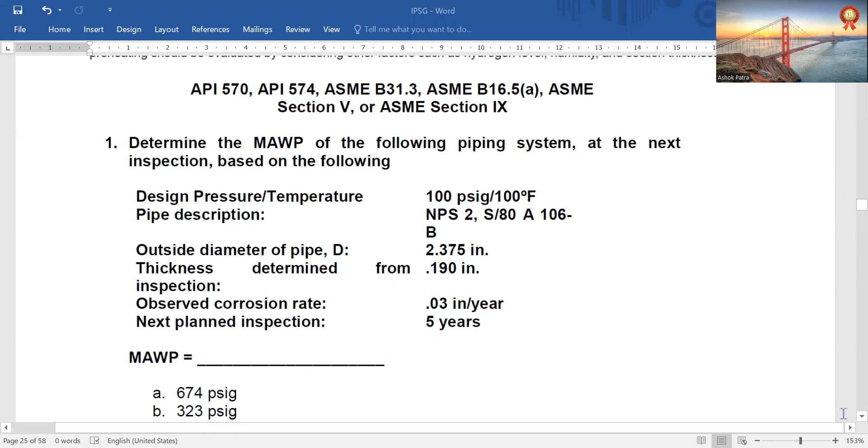You can find from the table 20,000 is... So it is 2 into S, 2SE, T minus 2 times corrosion, total corrosion.

It is taken for 5 years, it is not for 1 year. It's 0.03 into 5, that is 0.15 years taken. Just put here like this. Don't be puzzled by this. 2 into 0.03 into 5. All these things are there. So finally you get 2.

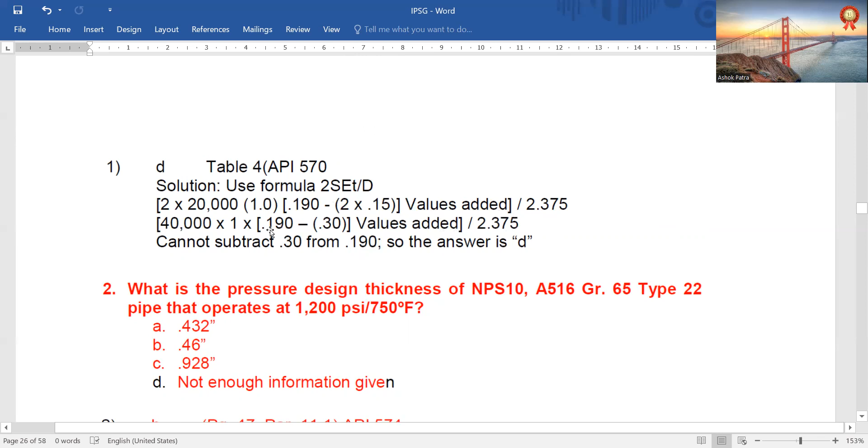Cannot subtract 0.3 from 0.19. So that answer is D. That means metal loss exceeds the requirement of the 5-year inspection interval.

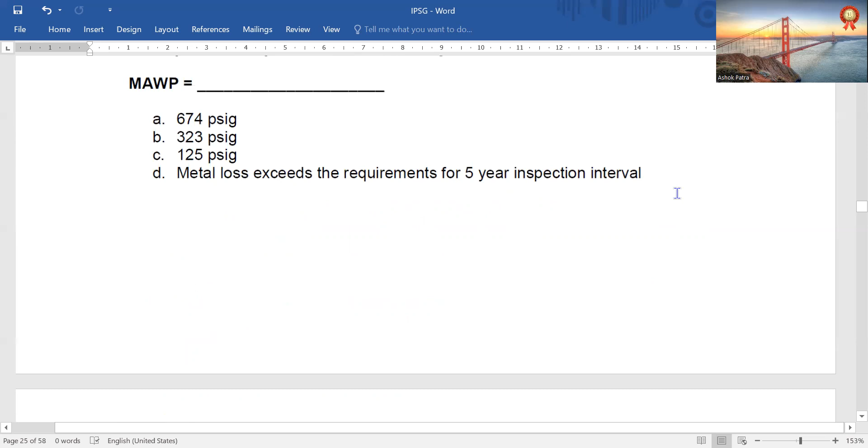But the pressure design thickness of NPS 10 A516 grade 65 type 22 pipe that operates at 1200 psi, 750 degrees Fahrenheit.

Same as before, you have to find it. This is 13900, but 1200 into 10.75 divided by 2, 13900 into 1, that's all. 0.46 is the answer. 0.46 inch.

A leak test is an alternative to inspection of buried piping. What is the minimum liquid pressure to adequately conduct this test? 10% greater than MAWP.

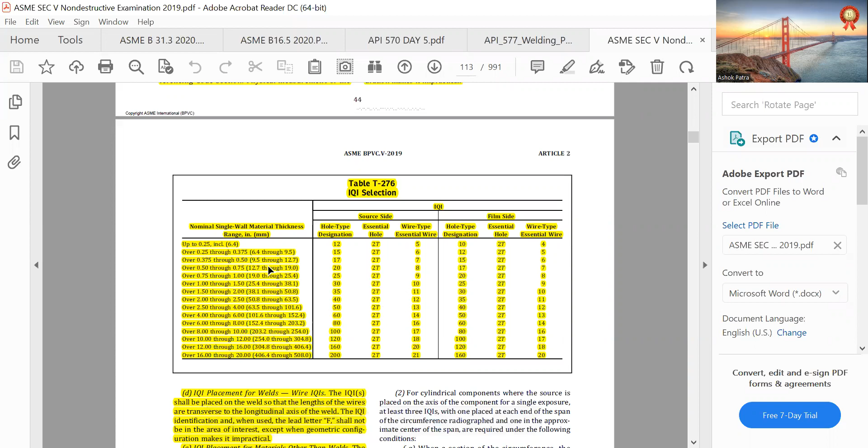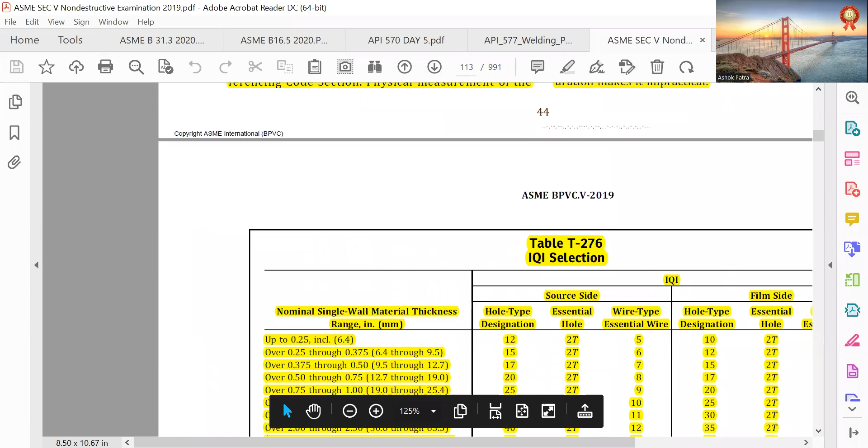So this is the inch and mm, you can just... over 0.375 through 0.5. And what is the question?

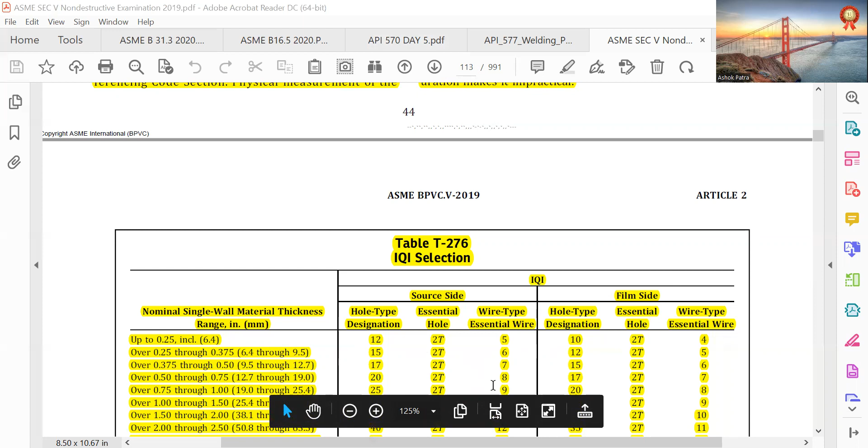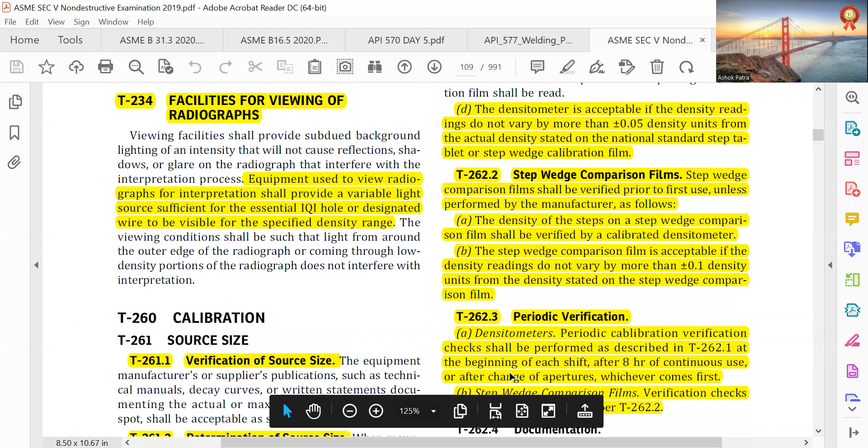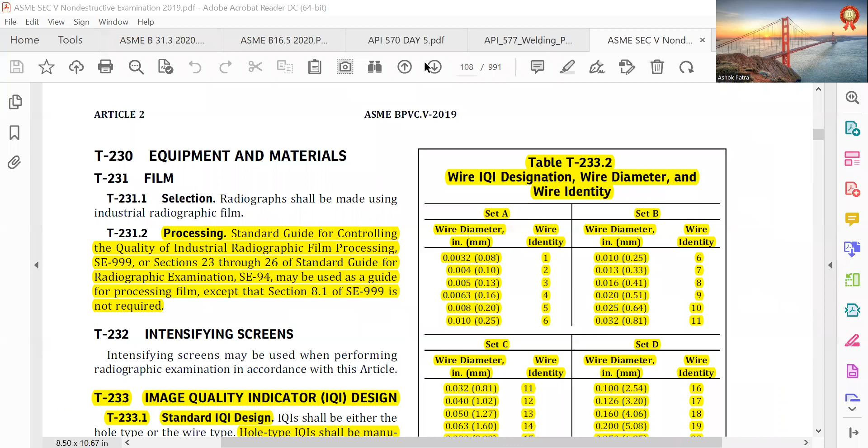Give the corresponding P number for 414 grade A material. You find it, or just remember it. Find from section 9. 414 grade A.

In class 1500 NPS for blind branch, what is the minimum thickness permitted? You have to calculate this.

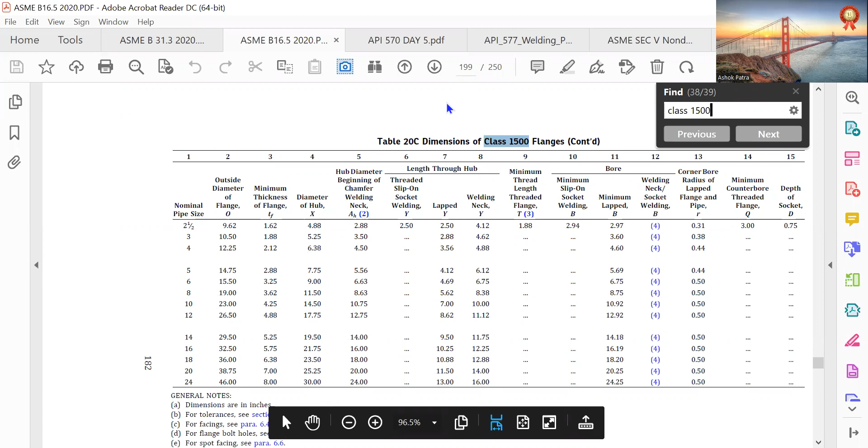For 1 1/4-inch thick carbon steel, what is the recommended preheat temperature? 1/4. Go for the preheat table.

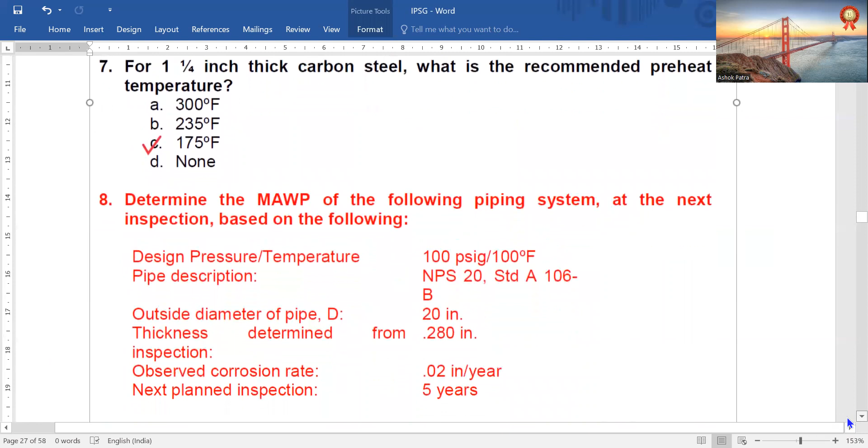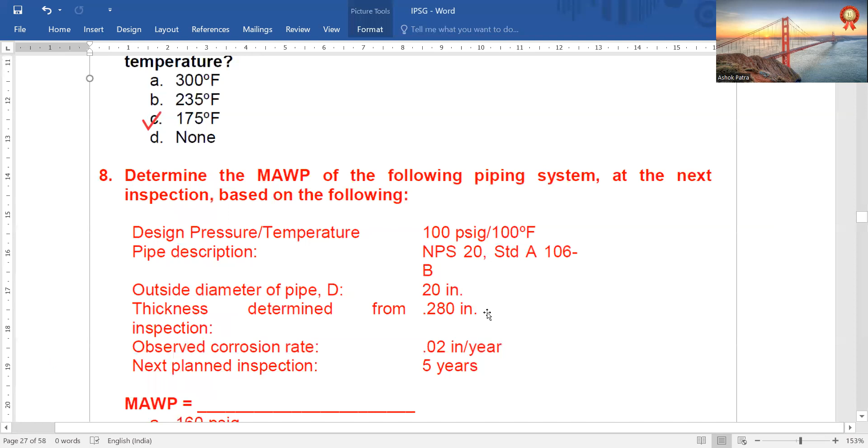Determine the MAWP of the following piping system at the next inspection based on the following: design, pressure, temperature, pipe description. 20,000 will be 20,000. If you see each time, you can understand. Diameter 20 inch, 0.28, 0.02, 5 years.

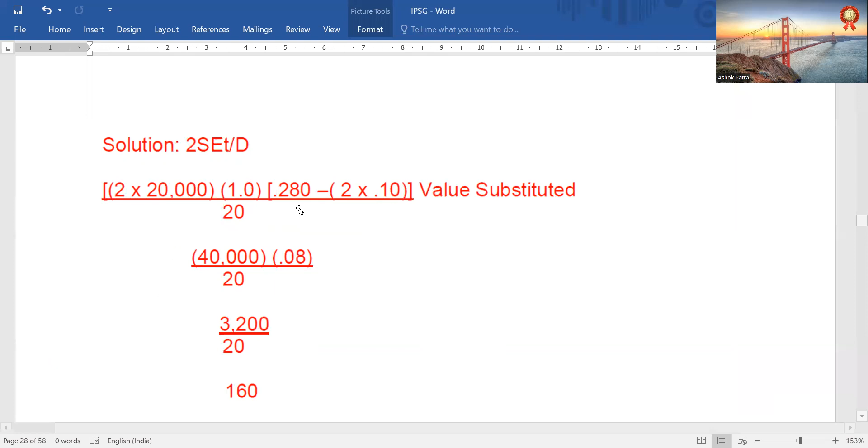20,000, 1, 0.28 minus 2 into 0.02 into 5. That is 0.1. So you have 160 psi. A is the answer.

With respect to category D service, what is the maximum allowable undercut for the branch connection? Less than or equal to 1 by 32 inch, less than or equal to 1 mm, both B and C.

But the test pressure of a metallic piping system whose design temperature is above the test temperature, using the following condition: NPS 6, A106B, 100 psi, 100 F.

So pressure test is 1.5 ST. ST is the temperature at the test pressure. Sorry, the stress at test pressure and stress at design temperature.

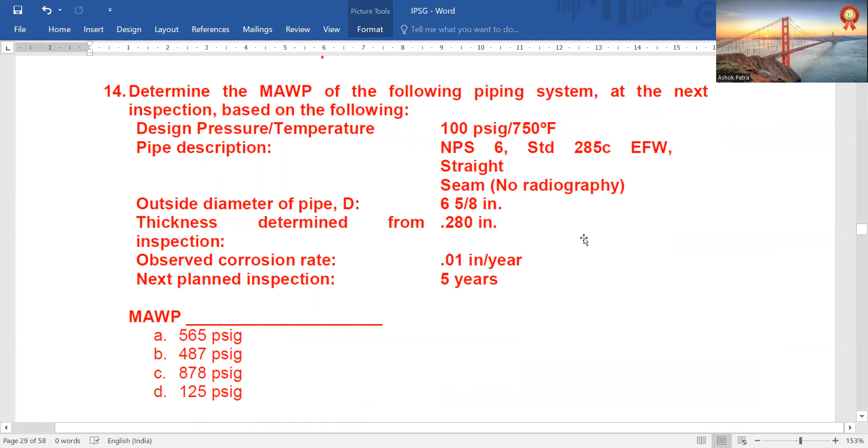Determine the MAWP of the following piping system at next inspection based on the following: 100 psig NPS 6, EFW electric fusion welding, straight seam, no radiography, 6 5/8 inch, 0.28, 0.01, and 5 years.

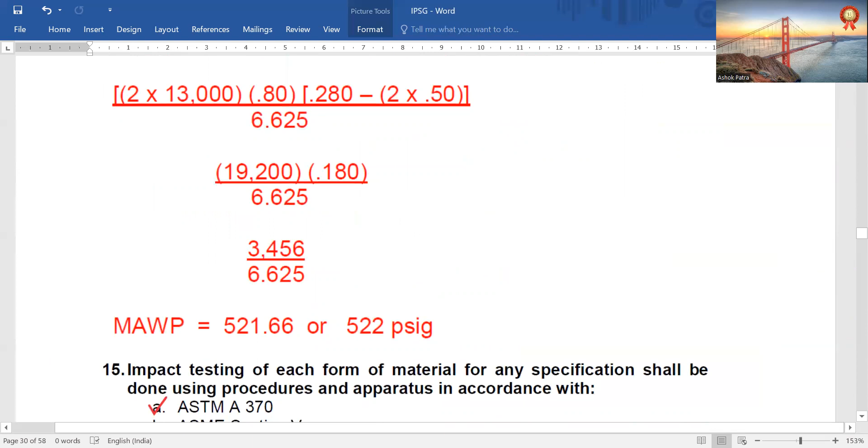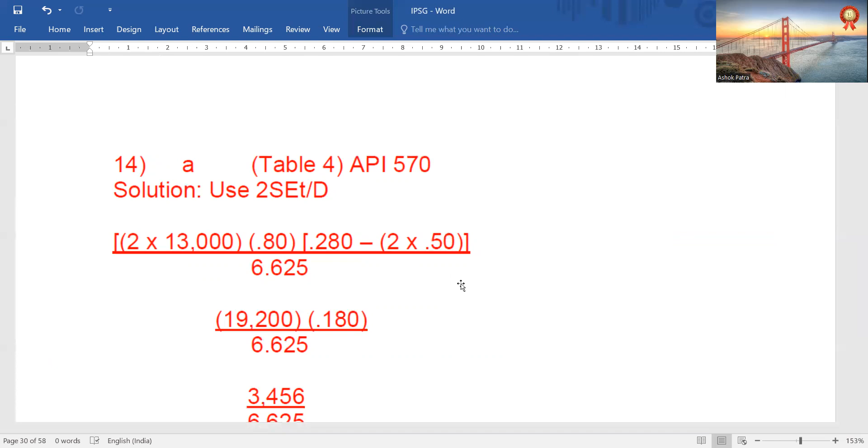They find 13,000, so 2 into 13,000 into 0.8. The efficiency factor is, welding efficiency is 0.8, and 280 minus 2 into 50 divided by 6.625 D. This 0.5 is 0.1 into 5.

So MAWP is 522 psi. 565, not there, it is not there. Should be 522.

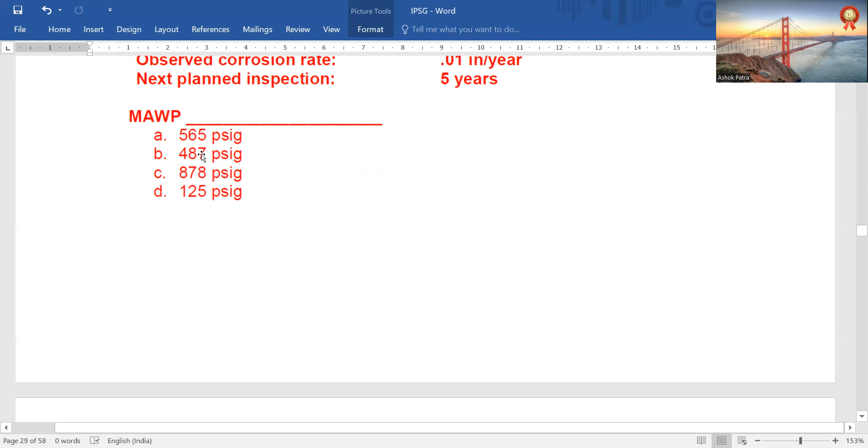Impact testing of each form of material for any specification shall be done using procedure and apparatus in accordance with ASTM A370. Impact testing of each form of material for any specification shall be done using procedure and apparatus in accordance with ASTM A370.

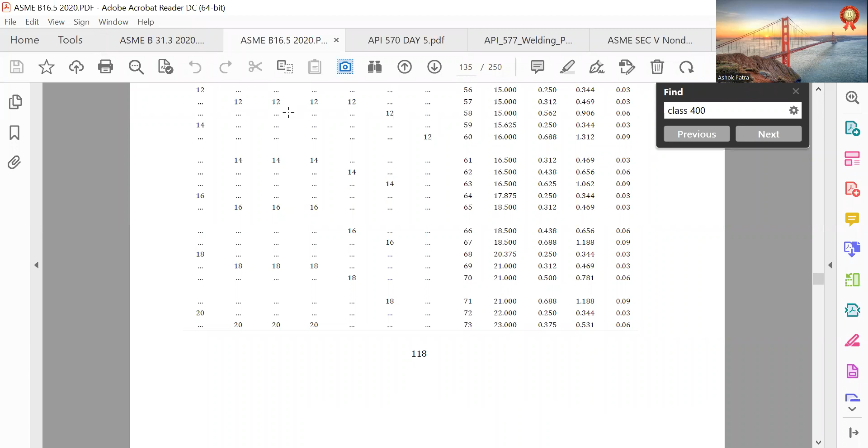Diameter, how much given? 14. Oh, NPS 12. So if you see NPS 12, so it is 12 if you go for like this. Class 400, 12, you go straight 15 PCD.

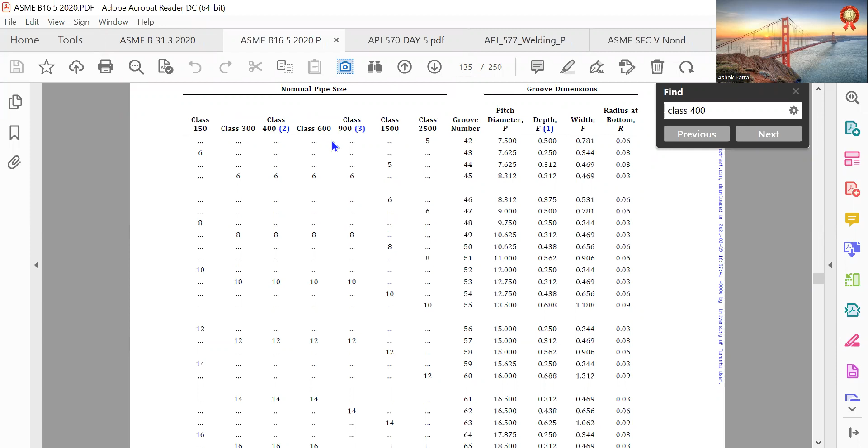Base metal P number 8 and the weld metal is A number 8, and the wall thickness is 1 inch. What is the hold time for heat treatment? Normally for SS we are not doing this, so none is the answer. This P number 8 is SS.

And regularly furnished class 300 raised face flange, what is the height of the raised face? From class 300 have to go.

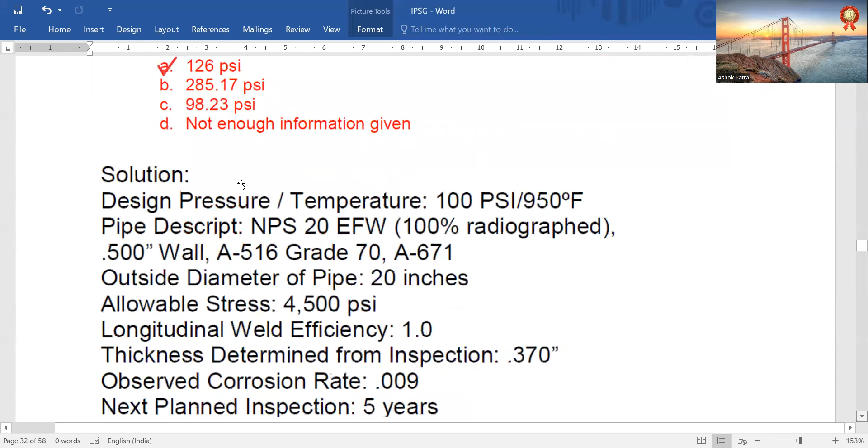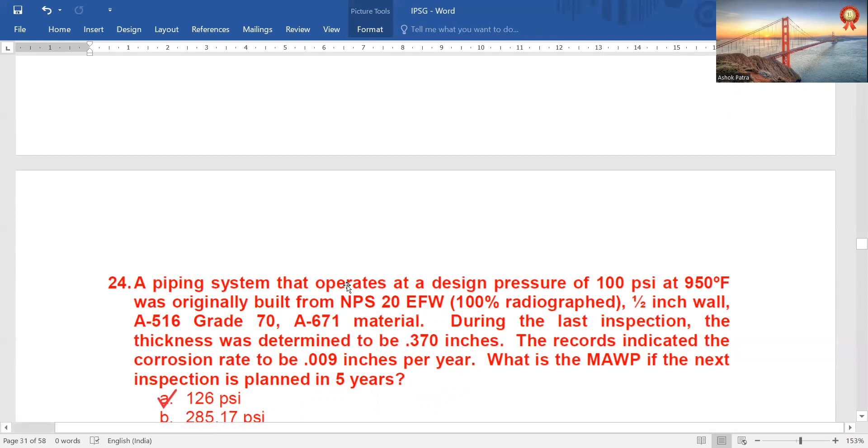100% radiograph, so 0.5 wall, 516 grade 70, outside diameter. Thickness determined 0.370 inches. Observed corrosion at 0.009 inches per year, and 5 years.

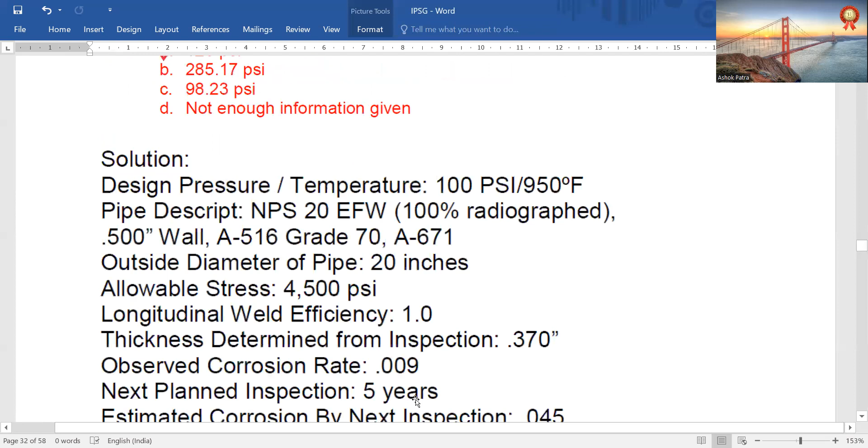0.045, so 0.045 now estimated corrosion. So what they would do, 2SEt, in the place of T they will put T minus 2C.

So in the place where MAWP calculation t is used, we have to minus 2C. So MAWP is coming to 126 psi. Here is the answer.

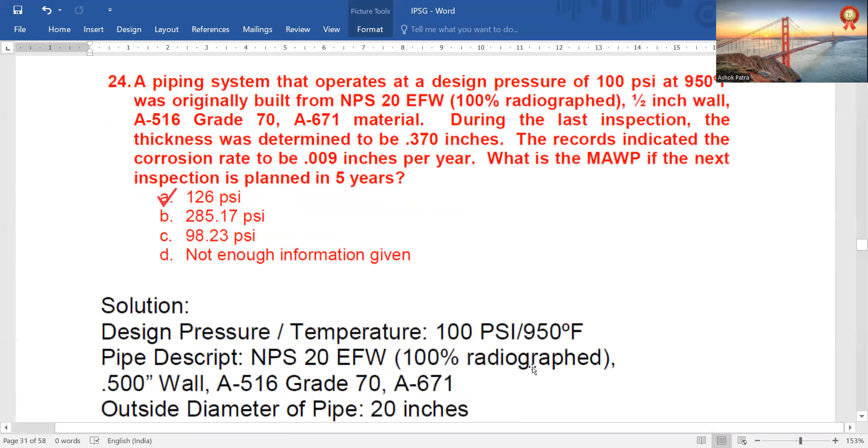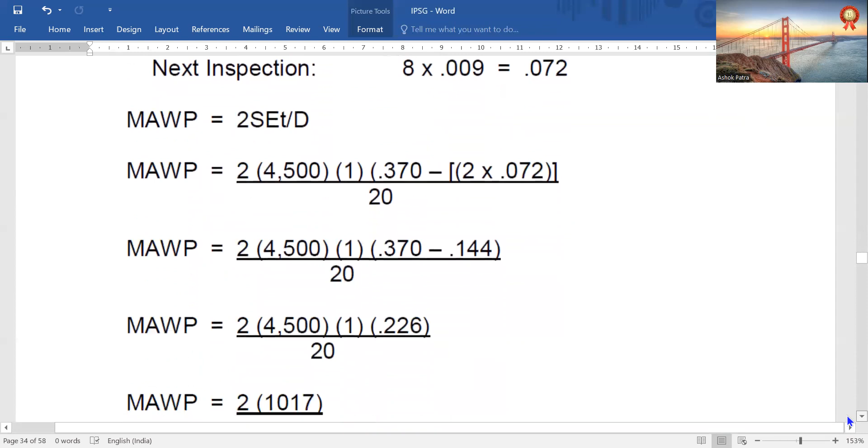Can the inspection interval for the system in question 24 be increased to 8 years? The next planned inspection is 8 years. The MAWP is 101.7.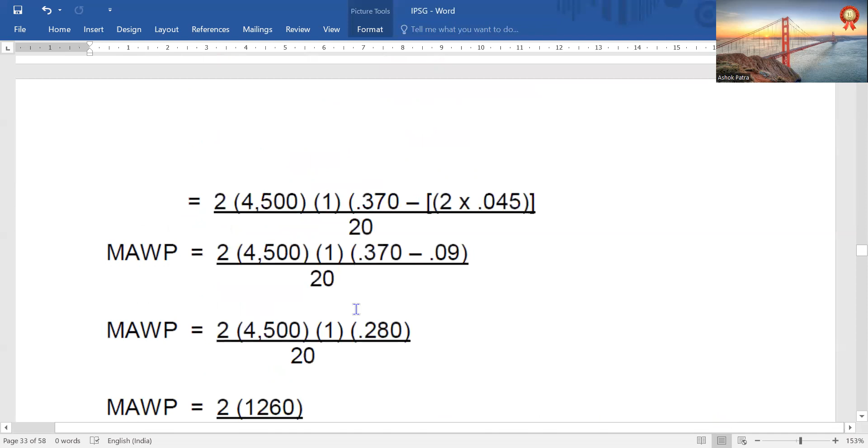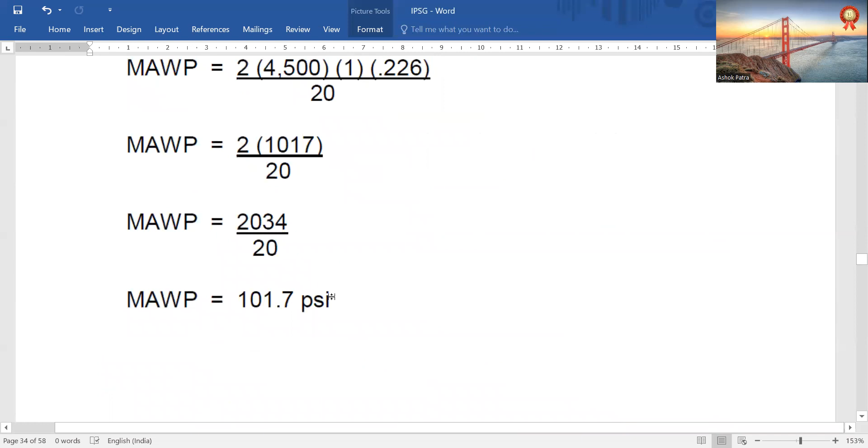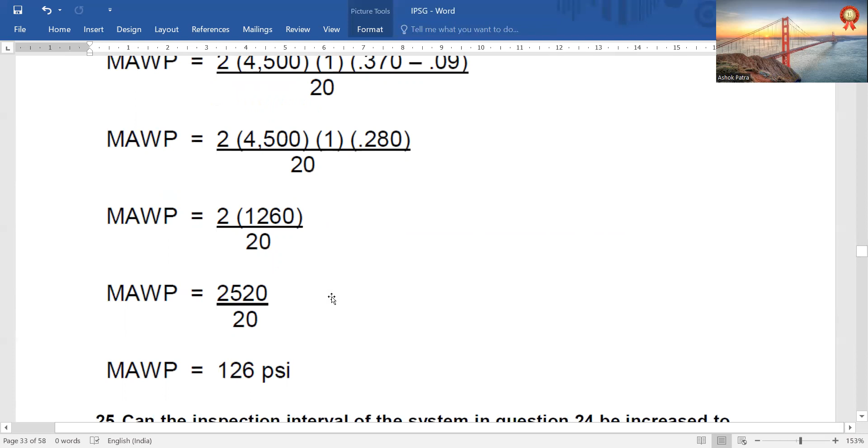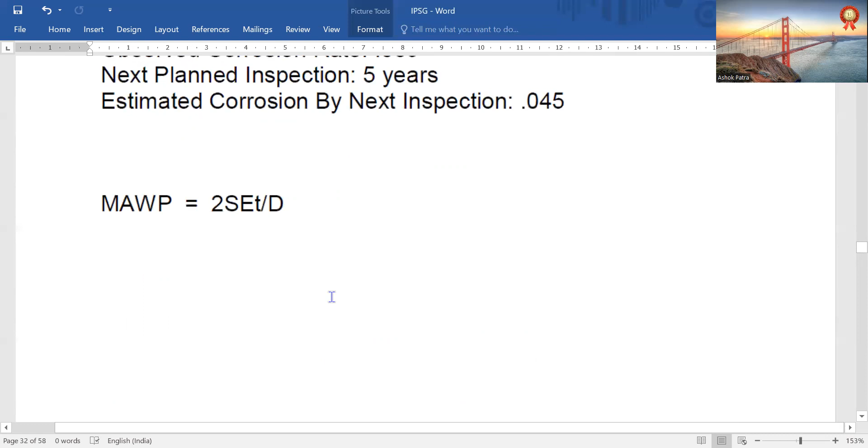Can the inspection be increased, okay, 8 years. They find MAWP 101.7. So design pressure is 100 psi, so it's okay, 101 psi.

When the MAWP is calculated, the wall thickness used shall be actual thickness minus twice the estimated corrosion loss before the date of next inspection. When the base material is P1 and the weld metal is A1 and the wall thickness is 7/8.

The holding time 1100 to 1200 for heat treatment is 1 hour. So 1 hour is minimum PWHT up to 1 inch. After 1 inch, change 15 minutes more for every inch.

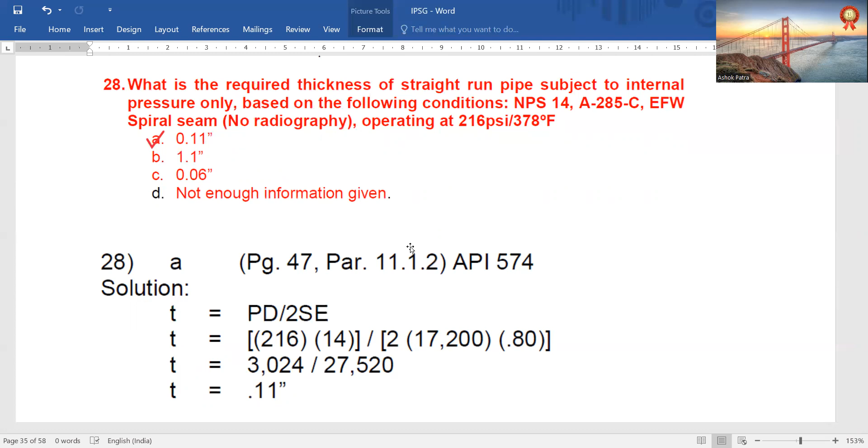What is the required thickness of straight run pipe subjected to internal pressure only based on following condition? PD by 2SE. 216 into 14 divided by 2 into 17,200 into 0.8, because it is electric fusion only. 0.11 is the answer.

The radiograph of the normal fluid service piping weld revealed a crack. What is acceptable crack length if known? Geometric unsharpness of a radiograph of a component under 2-inch thick shall not exceed 0.02 inch.